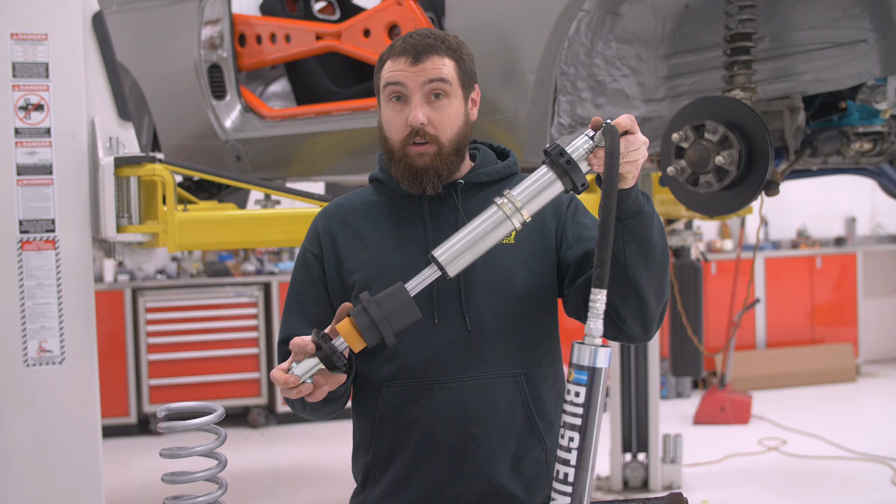For me, we're going to tackle the rear suspension in this video. You're going to see earlier on, basically when we started this project, and wrapping up some of it now. We're going to go from the torsion bar rear suspension to these big Bilstein remote reservoir coilovers for the rear suspension. It's a huge upgrade. We changed a bunch of stuff and it took some time.

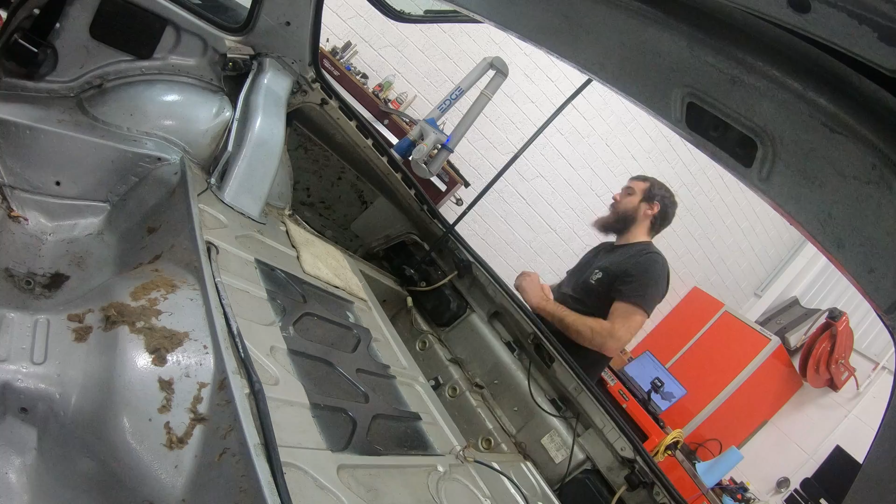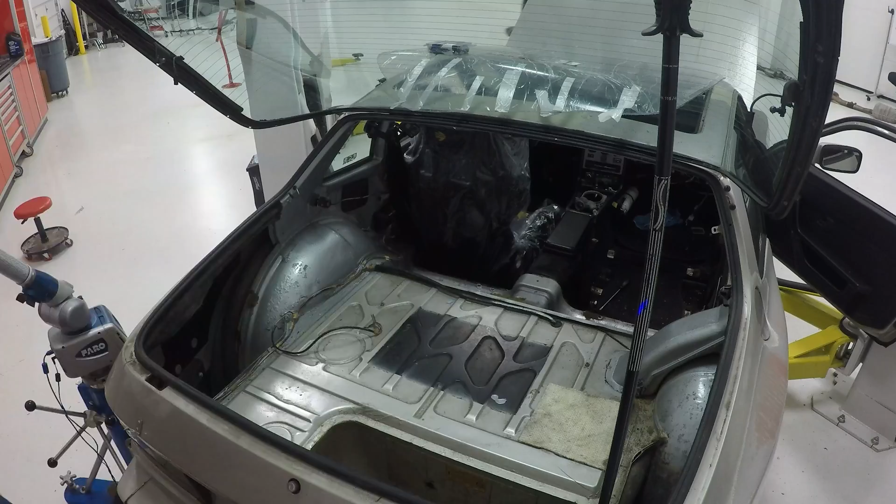For this project, the factory rear suspension would be a weak point, so we're going to do some upgrades. The factory car is a torsion bar setup with a small shock absorber. We're going to overwhelm both those as well as the bushings, so we're going to revamp everything.

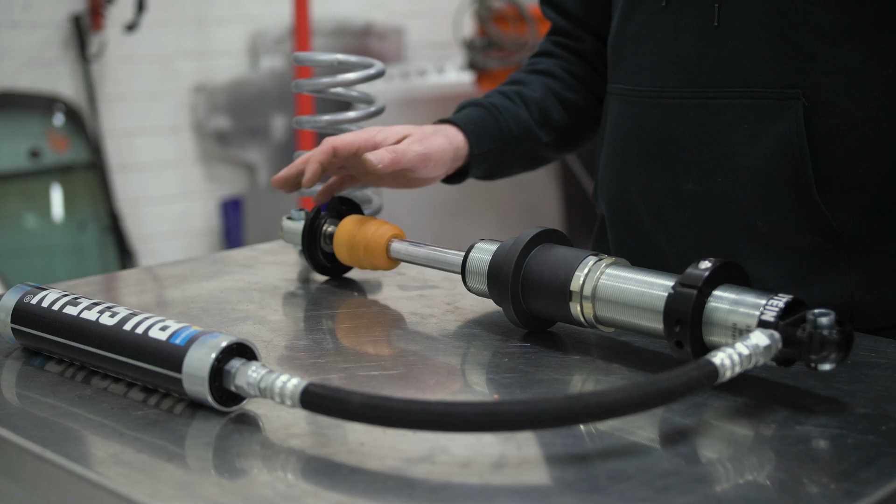I'm going to design everything to work with this much larger 8-inch travel Bilstein remote reservoir coilover. One key benefit is the extra thermal capacity with the remote reservoir. We can adjust our spring rates more accurately and control different ramp rates with this dual rate slider. We can have a different spring top and bottom, and then control where this bottoms out, so we can increase the ramp rate at a certain amount of travel.

So we're just going to try to make the back of the car rugged enough to handle and really utilize this big of a shock. Figured we'd go through a bit of the process here. You saw me scanning before. Once I got all my scan data, I brought it into this software we use, which is Polyworks. I aligned everything, all my different positions.

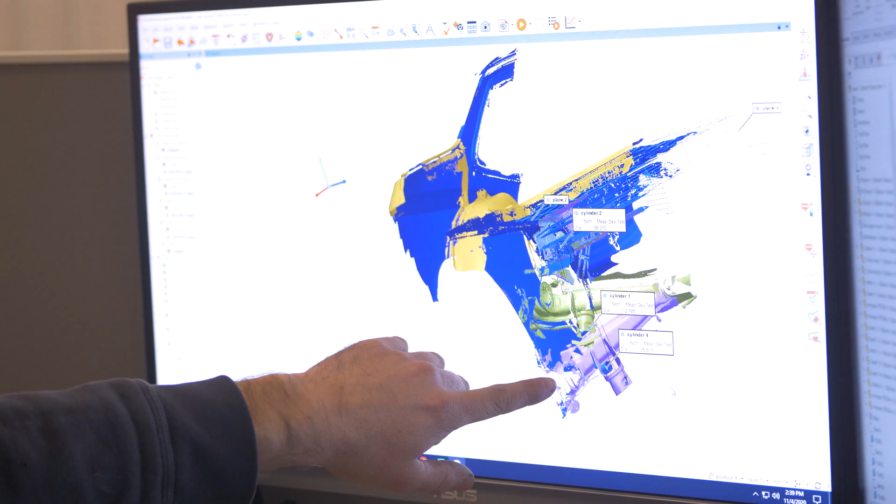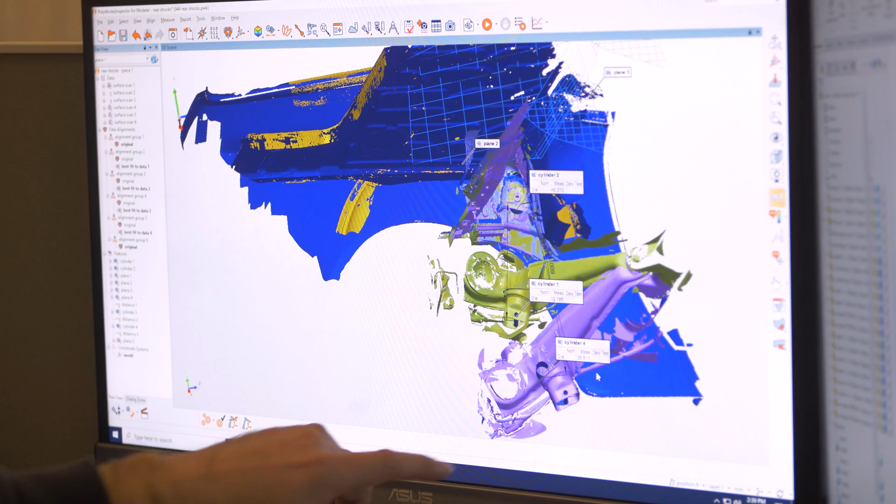This is the control arm at full compression, and this is the control arm at full droop. I was able to extract different features - this is the pivot point of the shock up here, and this is the lower pivot point. I could measure the distance between them, see what it was before at full compression with the old shock, and then I know the dimensions of my new shock. So I wanted full compression and full extension as a baseline of where that was.

Then I made some planes for different areas where I thought I might be putting some plates in to mount the shocks. I just created a couple features there to align stuff, and made a quick version of the shock just for dimensions.

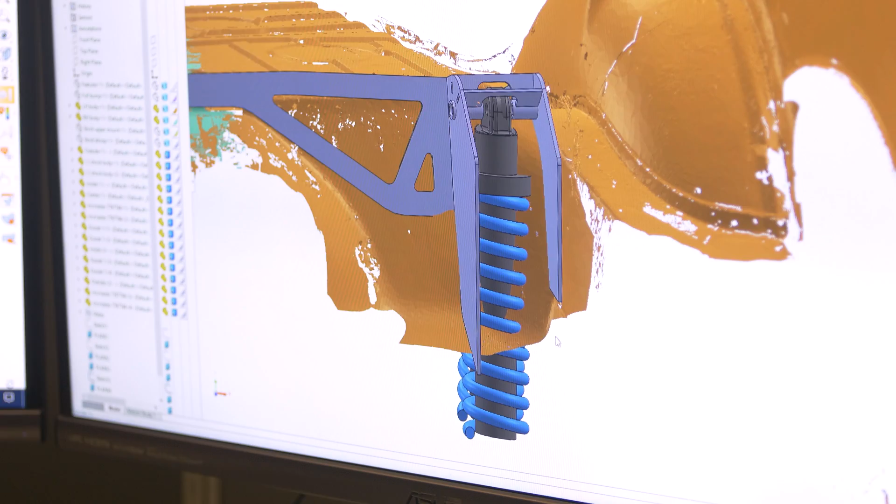I have two in here, as you can see. One is for full compression, which is with the control arm here - I know the length from playing with the shock, so that's where it'll line up at full compression. And with the control arm at full droop, that's this point over here, it'll swing that far forward. So that way I know I'll have space one way or the other.

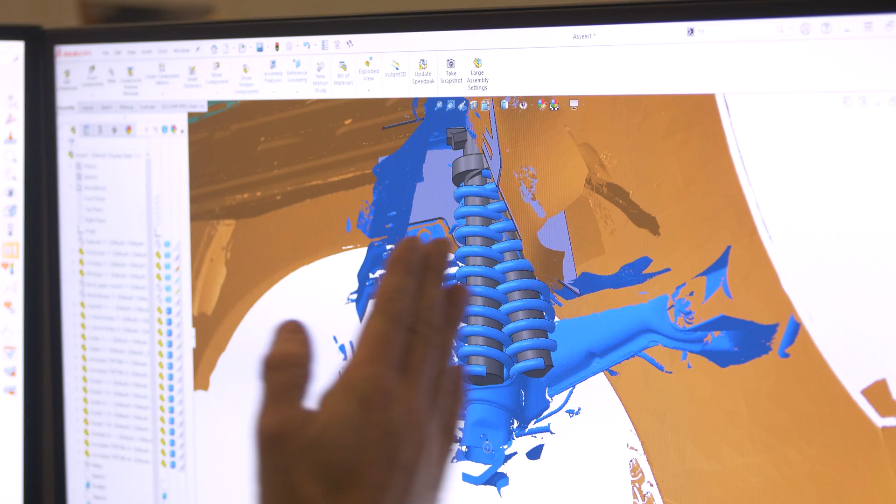The main thing that's in the way is this subframe mount here. At the very full compression, it'll be just kind of touching, so I can trim this a little bit and make sure I have space.

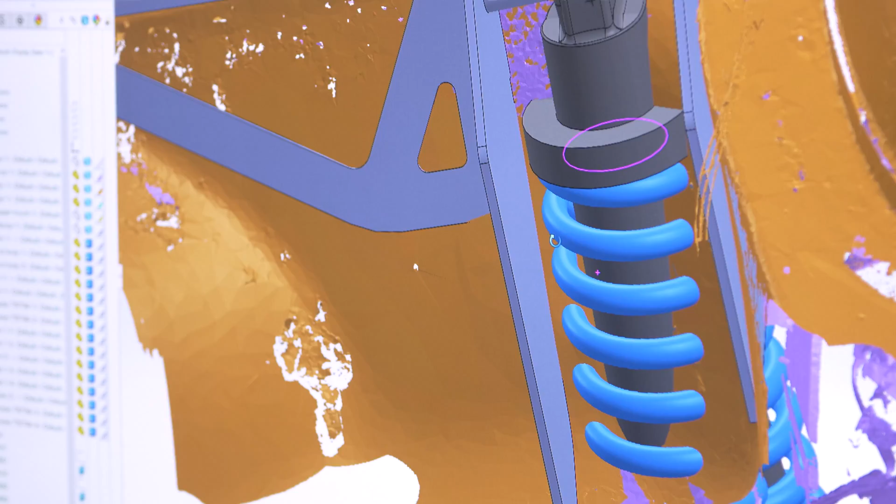This is how much space I need from inside the car. I'm going to plate both sides of it. This is the chassis rail on this outside edge here, so that'll be nice and strong - I can tie into that on the inside. The other thing I'm trying to avoid is this purple smudge here, which is the lip of the gas tank.

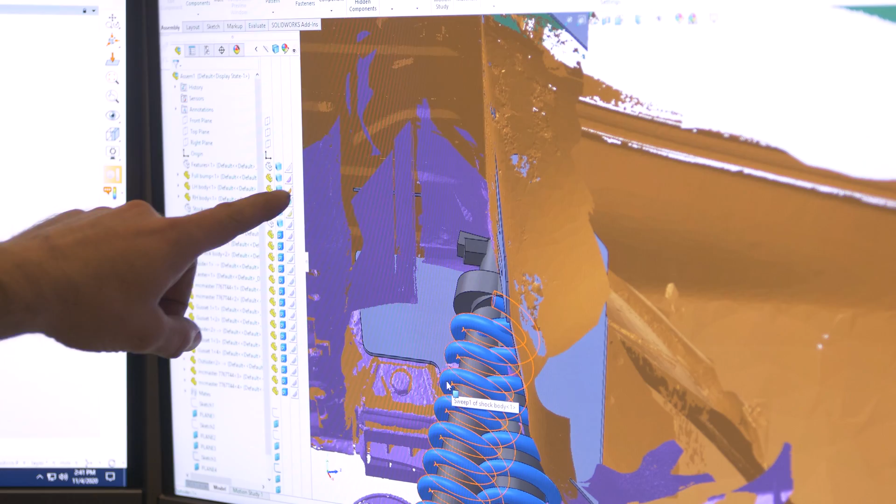So the hose for my shock has to sneak past the gas tank, and I don't want to cut into it right now. So I'm trying to stay in front of the gas tank, leave space for the hose and everything over there, and kind of not cut too far into the car.

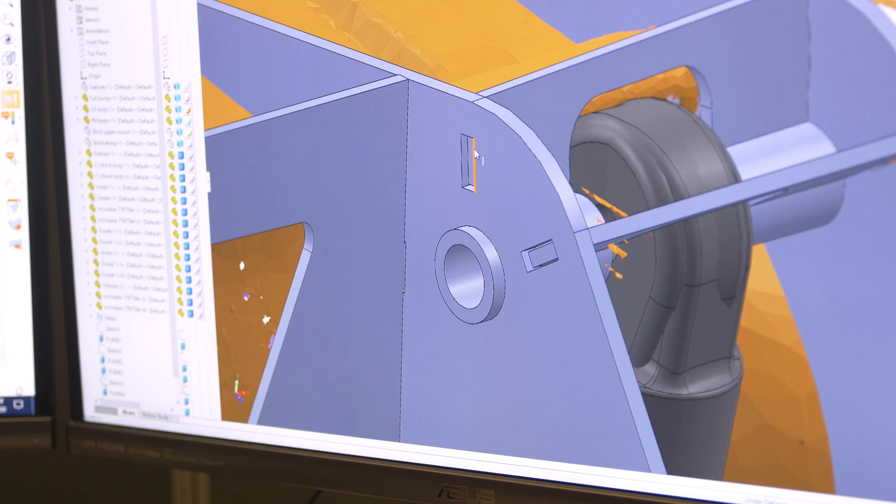Try to minimize that. So I've made these little plates here. I keyed everything together nice. So I'm gonna have these cut out by a friend of mine with a plasma table, so you can cut out little windows in them so that when I get all the pieces here, they align and click together nice. And then I can tack them all, set them in the car, and then weld them all together nice. So, same with this kind of brace between the two.

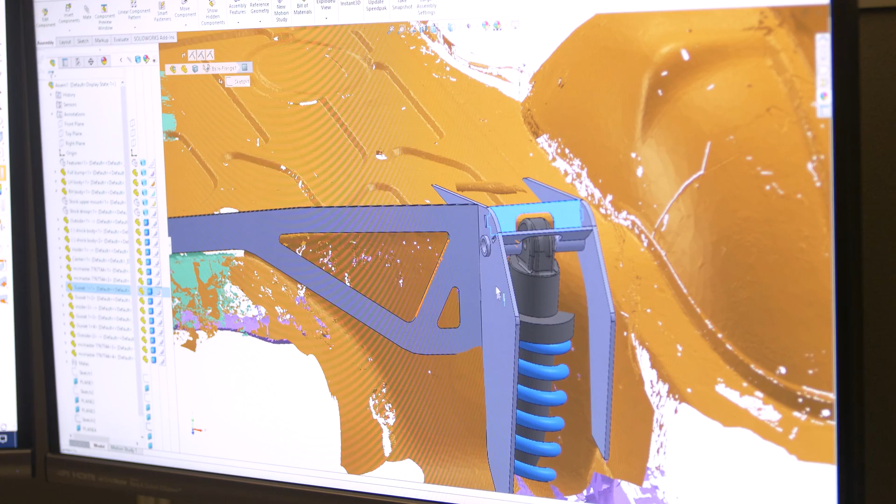This is just sheet metal here, so I wanted a little more support for this outer edge. So it's just kind of a sheet metal brace, but since it's being plasma cut, I can cut out some little windows, keep the weight down, and it'll give me some nice areas to kind of stitch weld into the body with.

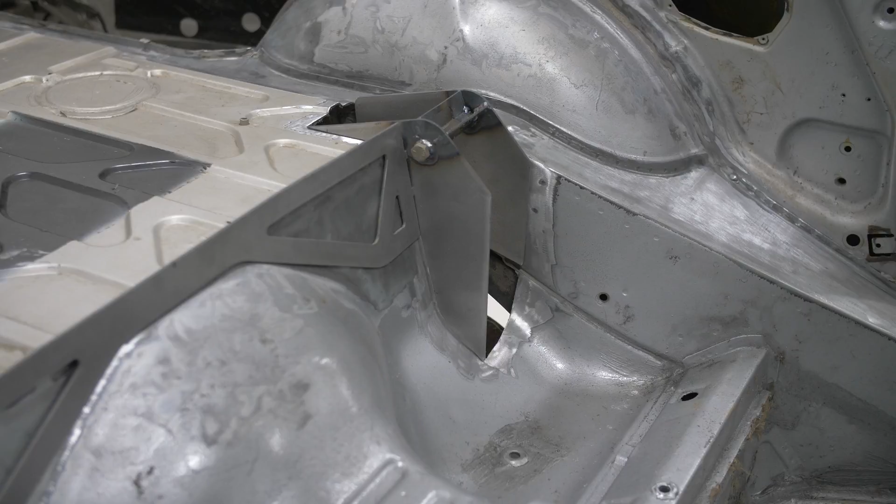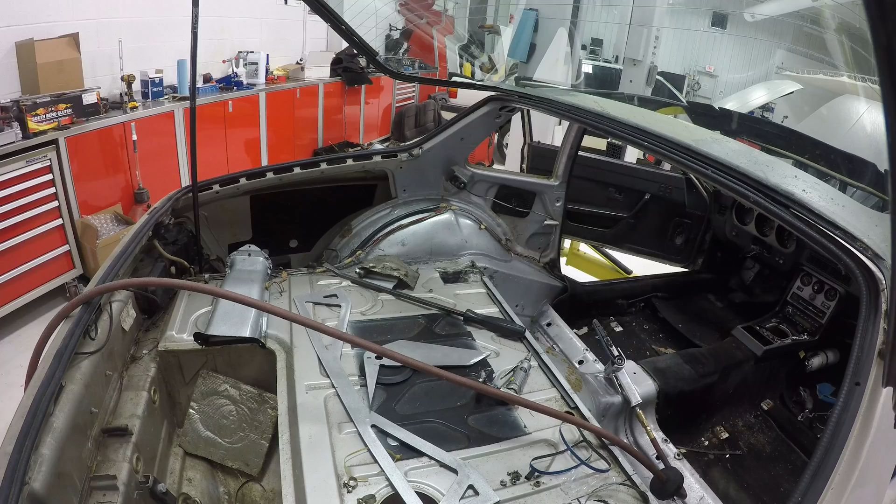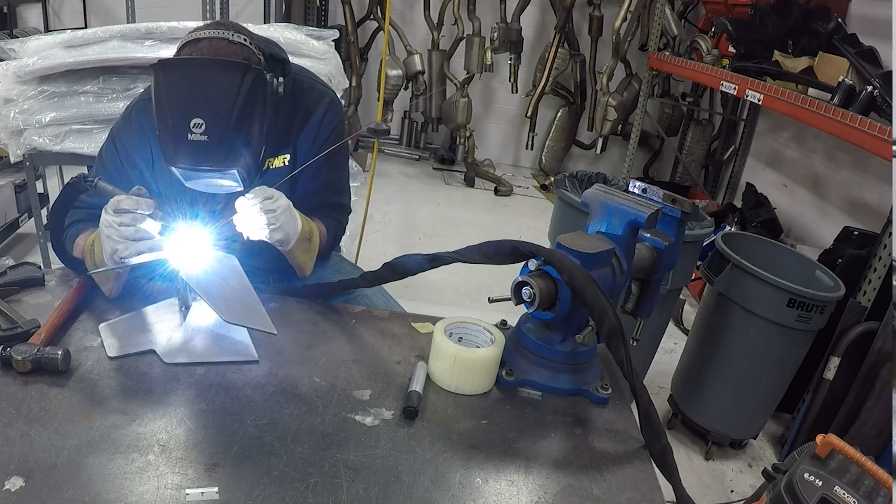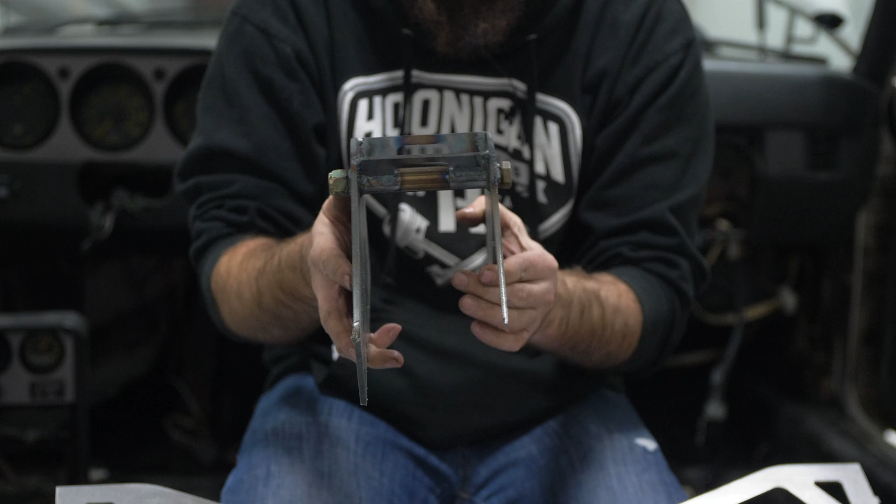So now we have the actual tangible pieces cut out from my buddy's plasma torch. So the next hurdle was cutting out the floor here. So this is one side I tacked up, well, mostly welded up now, but I had it just tacked up. It was the flat pieces I got, and then a sleeve here, and then another little support.

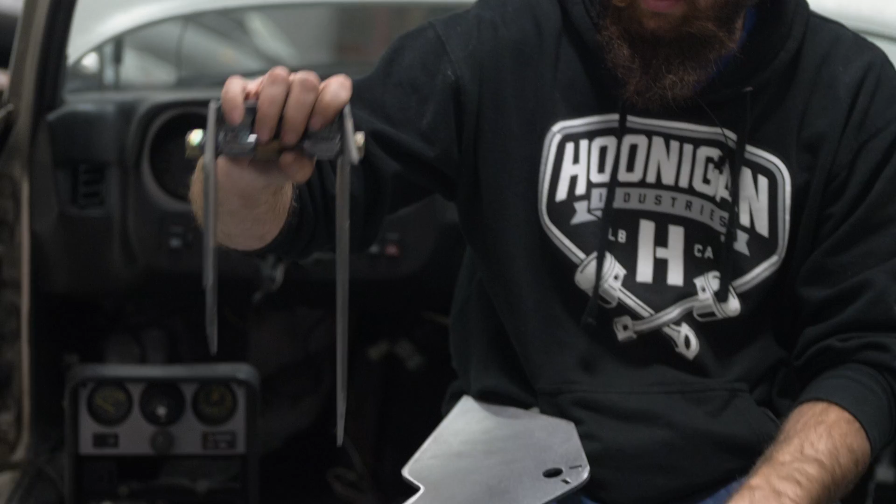So I still have to do that for this passenger side here. But the driver's side is welded up. I kind of just roughed my way in so that this fits pretty nice. I still have a little bit to trim on the inside, but I wanted to leave a little space so I have something nice to weld to.

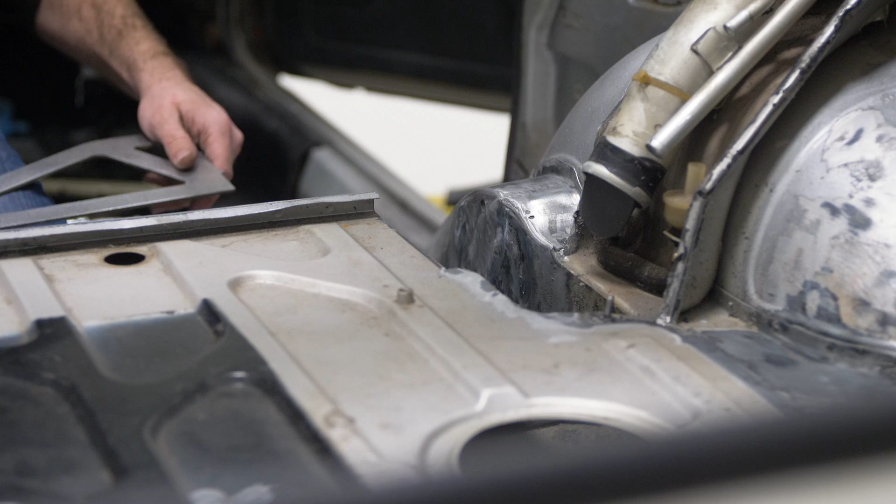So I had to cut out the old shock mount that was inside this frame rail here, and then kind of clean off all the undercoating, which is still a bunch to do. But I just cut this side out last night. So we're going to do the same thing again, where I end up tacking one up and then kind of get it to fit this piece nice.

Then this brace goes between the two here to strengthen it. And then once I can kind of throw the shocks in, I can start figuring out my plates for the top of this. I didn't bother modeling those just in case.

Basically the hose for the remote reservoir, those big Bilstein shocks, needs to go somewhere. I haven't decided if I want it to go out the front yet or out the back. It does have enough space for the fuel tank, but depends on what other things I have in here. So I can currently flip it either way and leave space for that reservoir tube.

So the next hurdle, once this stuff is all tacked in, is playing with the lower mount for the rear shocks. So I got to change the way that sits on the control arm. I didn't model anything up there. Probably won't, probably just going to wing it. But it's a lot more straightforward than this.

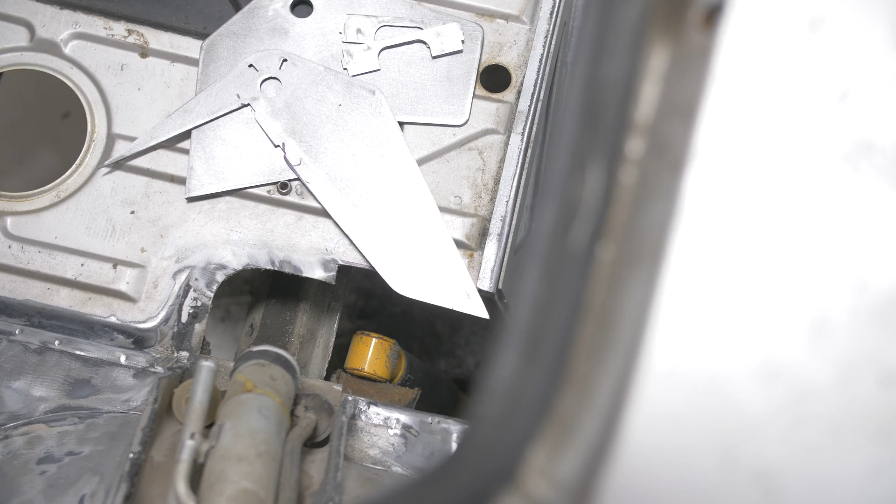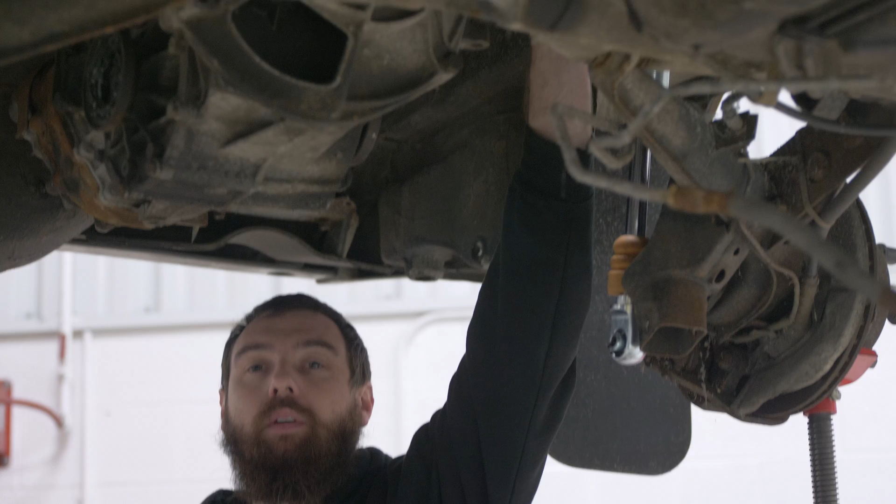Yeah, everything's tacked in, a little more than tacked in. I kind of get carried away welding. But the upper mounts that I designed are in. Shocks hanging in there at the moment.

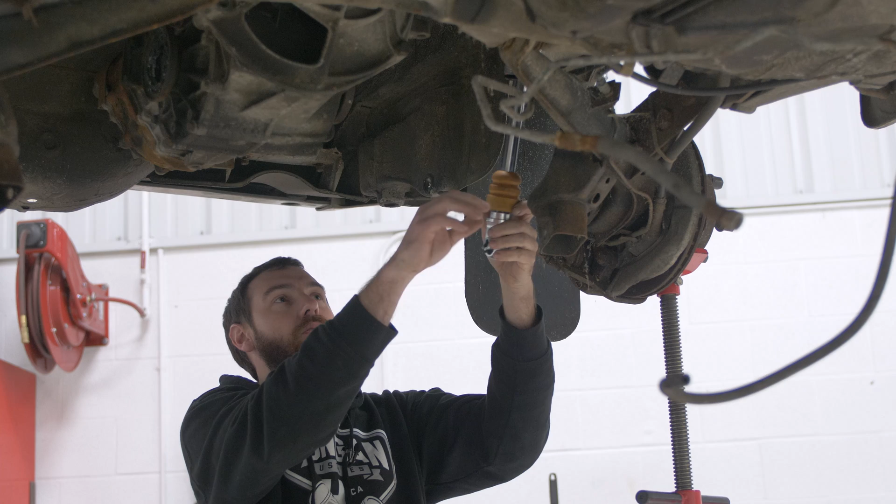I needed to throw the perch on and then start redoing these lower control arm mounts here, because I have a much bigger spring that needs to fit. So I'm probably gonna have to notch the control arm a little bit. And then I want these to be quite a bit stronger than these stamped steel stuff.

But in order to figure out where that needs to be, I had to throw the trans back in, and then I got to throw an axle shaft back in to make sure I have space for the spring between the axle, and then see how far I can get into the control arm.

My fear is I think I'm going to have to notch this control arm a little bit, because when this goes up all the way, it moves forward a little bit. So I feel like the axle has a chance to get into here with the pivot point being so low. You don't want it too high in relation to the wheel, it starts to get towards the center line of the pivot.

So you start to lose the motion ratio of the shock. The top of the shock doesn't move and the pivot point of the control arm doesn't move, just the lower shock and where it meets the control arm moves. So if you have it mounted like this, the more it compresses, it gets to this point where it wants to over-center and you start to lose control.

And that's where you want it to get stiffer, and this makes it softer. So if you move it lower, it'll keep getting stiffer up to the halfway point, which is about where fully compressed is about perpendicular. That's kind of how you want to set it up, so the only times you should be compressing the shock that much are at a huge impact, so you want it to be stiffer there. The motion ratio of the shock will move the shock shaft a little further at those fully compressed points than when it's at droop, where it doesn't matter.

For rally stuff, I'm not going through deep ruts or anything like that. I am going to box them in with some pretty heavy stuff, and that's only because all the stuff getting kicked up off the front tires can kick up big rocks and everything like that that might hit it, but it's not going to hit a stationary object in the trail or something.

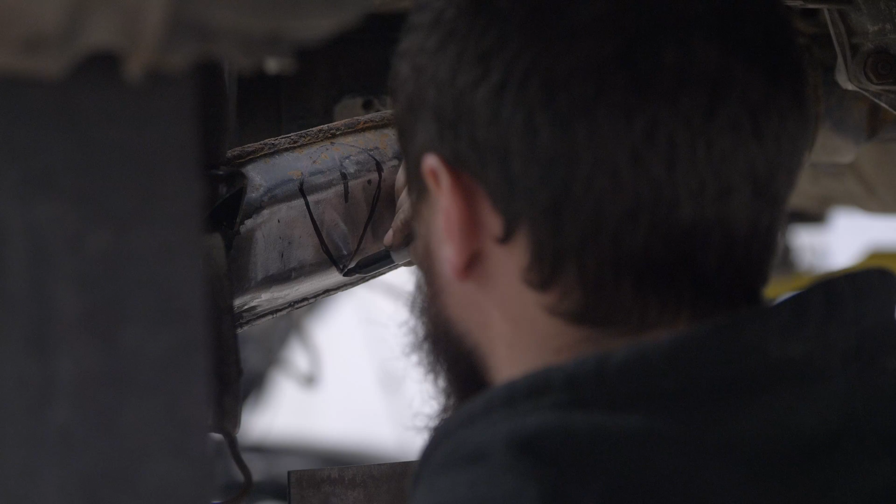Not super keen on this. Will that weaken the control arm? Yes, quite a bit actually. Are you going to reinforce it or not? Yeah, I don't know how yet, but it's going to have to happen.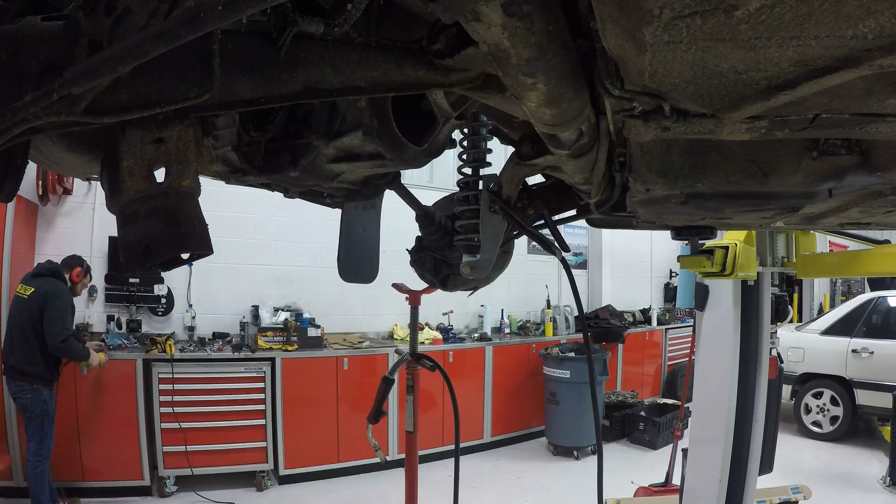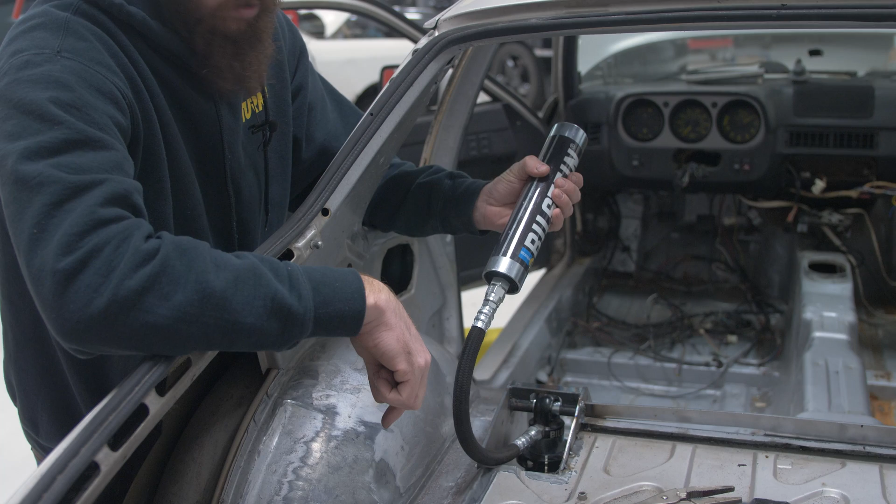Still going to figure out this whole boxing things in bit separately. I want to plate all this, but I want some of the interior stuff done before I do that. Because for all I know, I can flip this right now the other direction and have the resi tube go that way. But right now, it's looking like if I were able to mount it here, that'd be perfect. But for all I know, a cage tube's coming down here for the down bars from the B-pillar, so whether I can put it on a tube and that keeps it out of harm's way, I'm not sure yet.

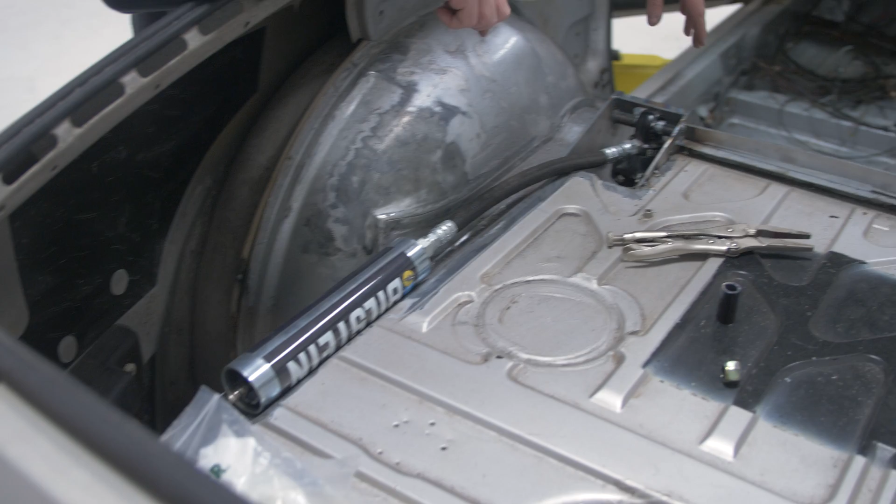So I'm leaving that apart for now, but all the mounting points are figured out. I've now figured out the rear shock mounts, the lowers. As you can see, I cut a big hole in the control arm for the spring.

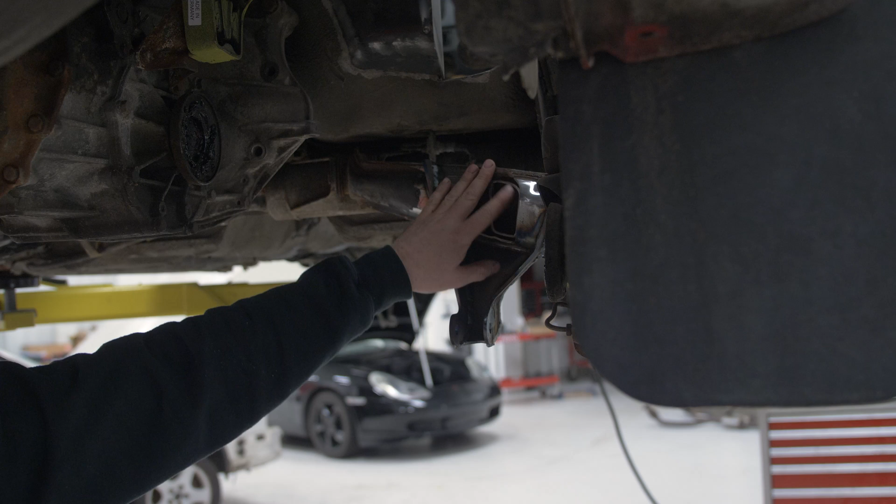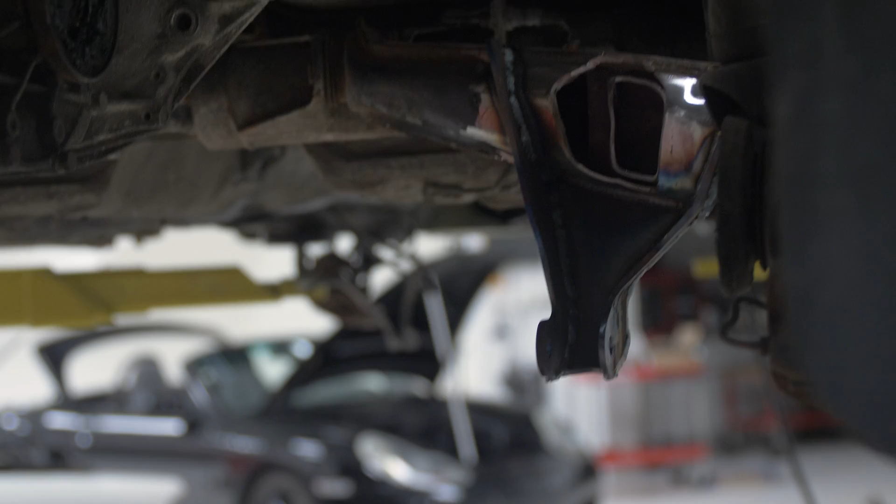They're pretty much in the same location as the stock ones, which did this, more or less, a little lower, but so I'm not worried about dragging these. The tires here, this isn't a rock crawler. I'm not going to be smashing these off stuff, but they are rugged enough.

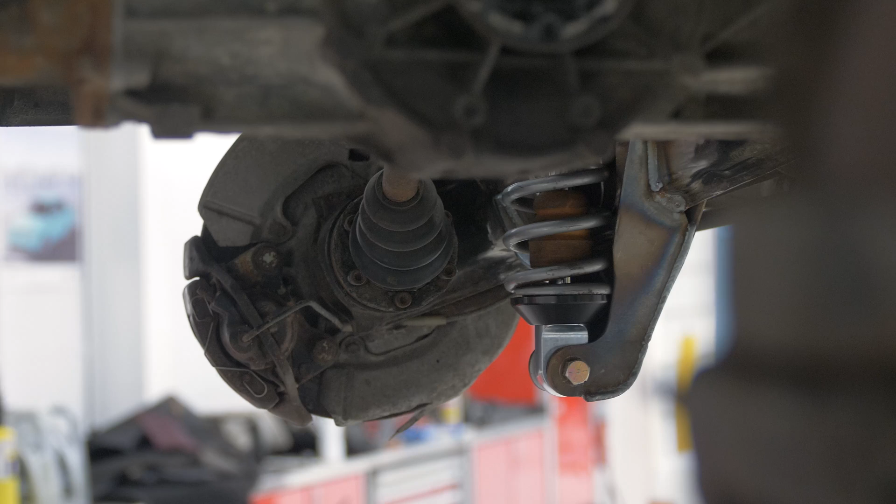It's all 3/16 plate. I had a notch for the spring so that at full droop, it has some space. I am going to plate all that in, and I am going to reinforce the control arm because obviously cutting a big hole in it made it a lot weaker. But I'm going to wait till it's off the car before doing that. So there's tons of space here, but when it's at full compression, that's when it's a problem. Now that I have the spring on, we can't go to full compression.

So this is the rear subframe and control arm from the 944. These are a torsion bar rear suspension, so there's this rod, which is splined on both halves, and it's splined in the center section, and then to the control arm out here, and that's what your spring is. So it had a shock point before, and this was your spring.

These are not that adjustable, and for the amount of travel and abuse I'm going to put this car through, I don't want the torsion bars. So you saw we already cut out the rear floor of the car and made mounts for the nice big Bilstein remote reservoir coilovers, and I kind of figured out my position on the control arm for where those needed to mount. Now I've got to revamp all this stuff to make it hold up and kind of refresh it all at the same time.

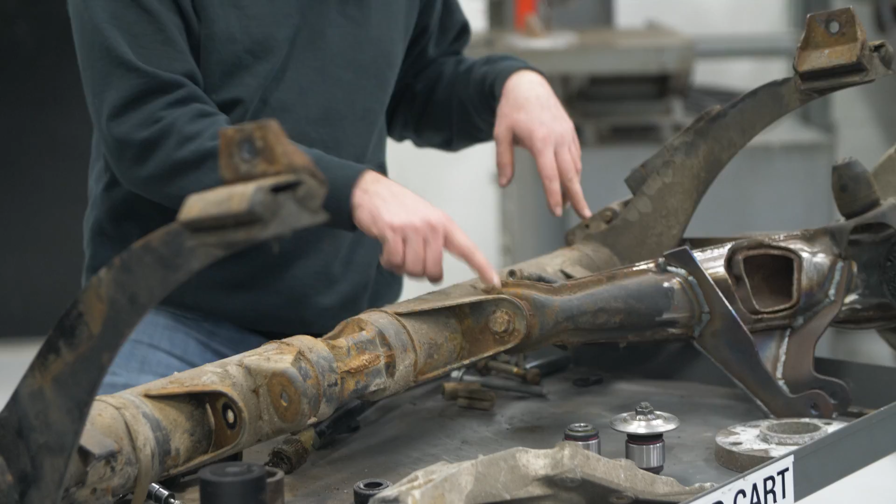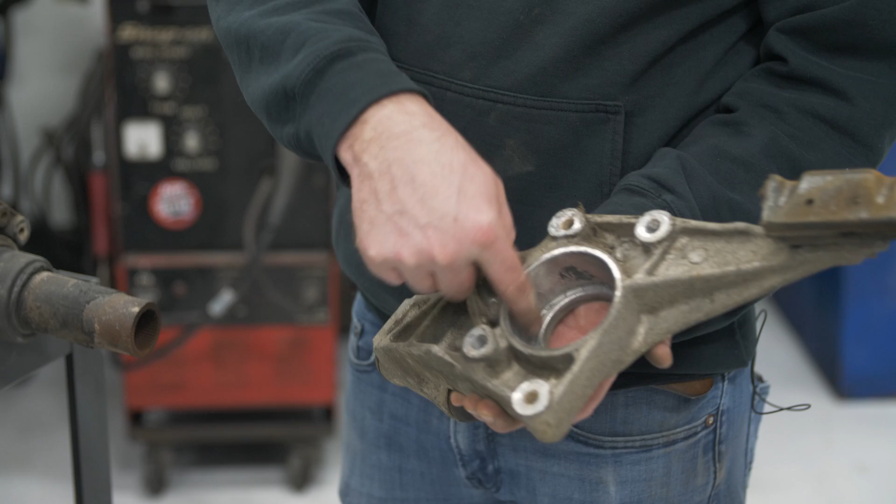There's rubber bushings in both these locations, so I'm converting everything to a monoball style like we do with a lot of our control arm kits. This is the end of the subframe, and this is the bore where the bushing rides factory. This rubber bushing is bonded onto this one part of the control arm, and this is separate so it's adjustable. You can twist it one way or the other, and that's how you adjust ride height with the torsion bars.

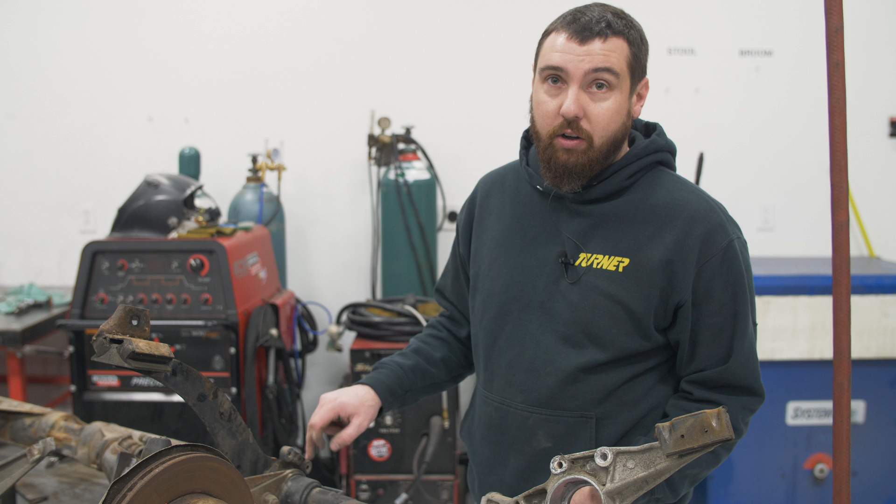All that's going away essentially because now we're going to be cycling 8 inches of travel at the shock, versus before you'd get like 6 realistically, and you never saw that on pavement, nor did it cycle frequently. With this car going through dirt roads and bumps, it's going to cycle a lot more suspension travel, more frequently and faster. So this bushing is not going to live very long at all. Also, it deflects a ton - I noticed the toe change on and off throttle was pretty dramatic, and you could see it on the dyno deflecting both bushings heavily. So we're converting everything to a solid spherical monoball, which will be more accurate, live longer, and I shouldn't have to maintain it again.

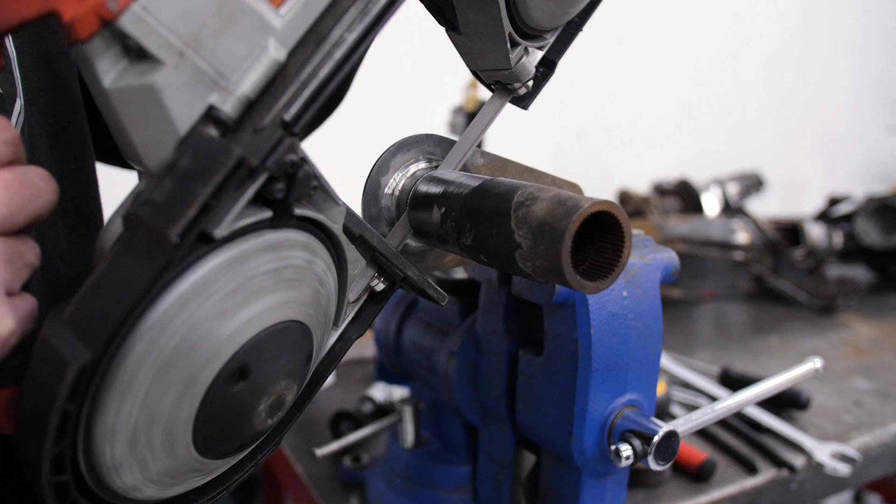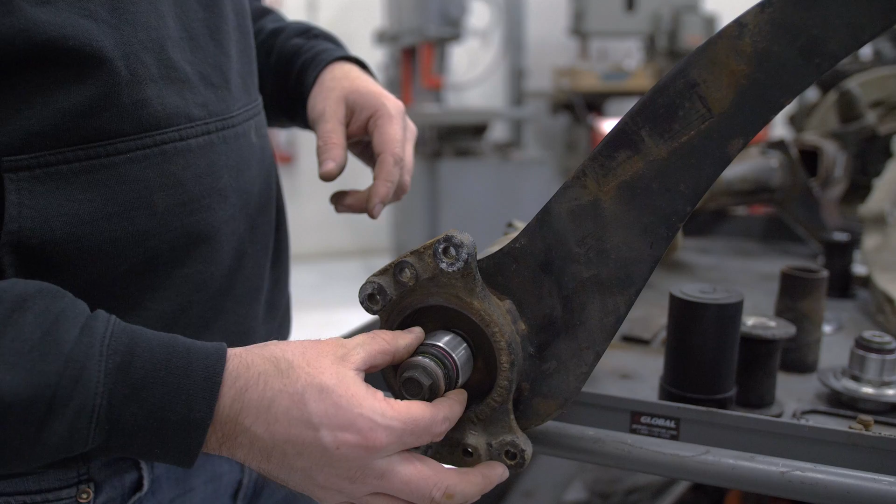This is the outer control arm mount here, which had the spline portion for the torsion bar. I cut that off, chucked it up in the lathe, and bored the center out. Now I can press a monoball into here to take care of this outer location on the arm, but I need somewhere for it to mount since it was just a rubber bushing in this bore. So I turned up a little disc with some threads and a welded nut, and I'm going to weld that into the end of the tube. It locates really nicely - this is the end of the subframe, an aluminum piece that bolts on here.

This part has a rubber bushing that I'm going to replace and mount to the car there. There was a rubber bushing here too, pretty old and decrepit by now. So I turned some little Delrin inserts, so it'll be pretty much a solid bushing. This will press into either side here and locate into the body of the car.

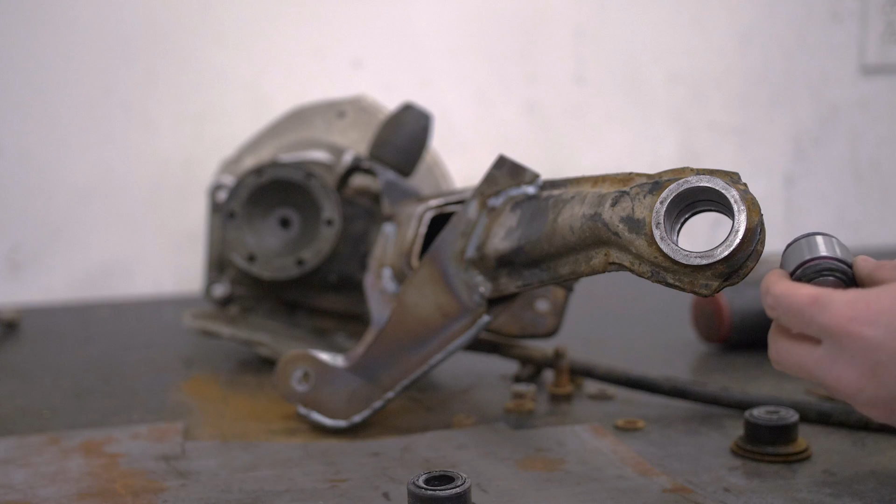The inner control arm mount was just a pair of rubber bushings, and those aren't going to hold up for what I want to do, especially with all the travel we're going to get. So I chucked this up in the mill, fixtured it in, and bored this out for the monoball, which will press into this location. That just leaves reinforcing the control arm, because I had to take a big notch out for the coilover spring at full droop. So we're going to plate this in - I'm cutting some plates to box in the backside of the control arm and re-strengthen it, so we'll have a nice, hopefully bulletproof setup for the back of the car.

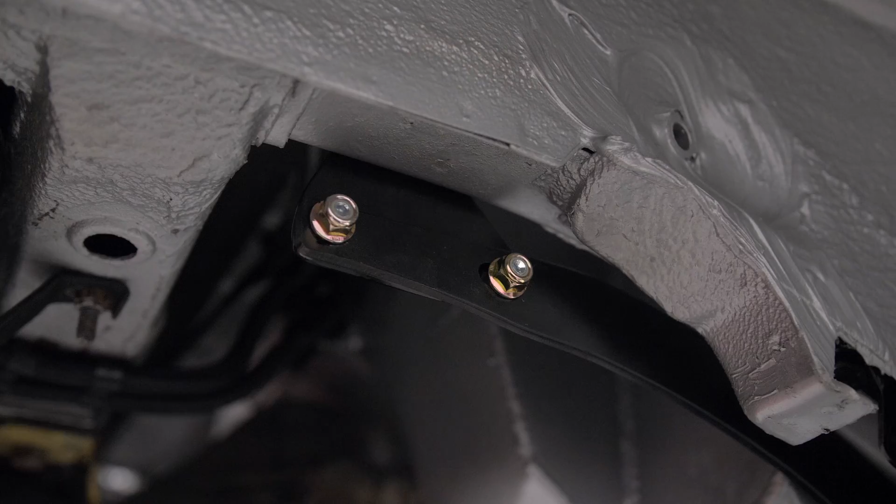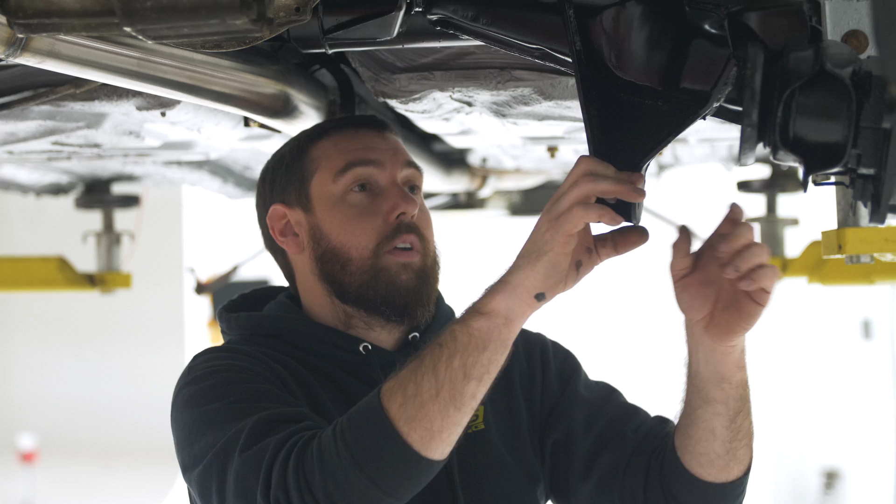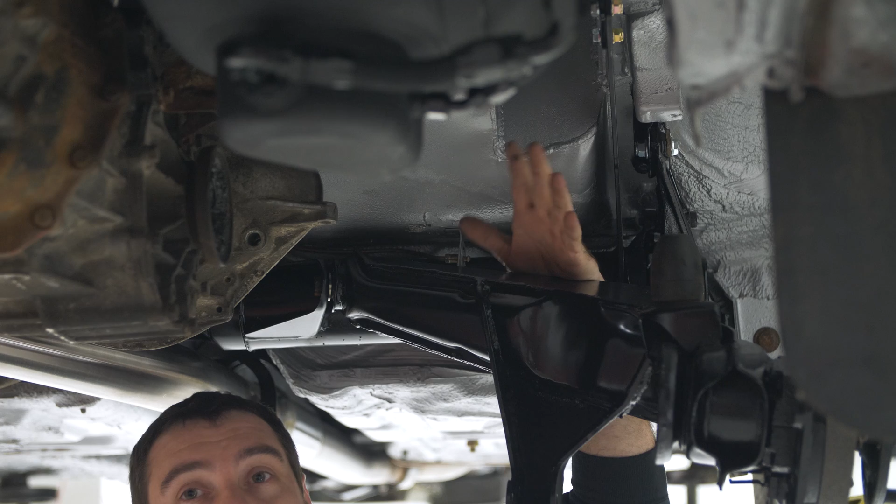So for the rear suspension on this, we've gone from just a single small shock mount with a torsion bar setup, to now a fully adjustable coilover setup. We've made mounts here, boxed in and strengthened the control arm. I cut out the floor, made all sorts of reinforcements to bring a much larger off-road capable shock into the cabin, so I could cycle the full travel. This should make a huge difference on this car, because the rear suspension on the 944 is kind of a weak link for doing rally things.

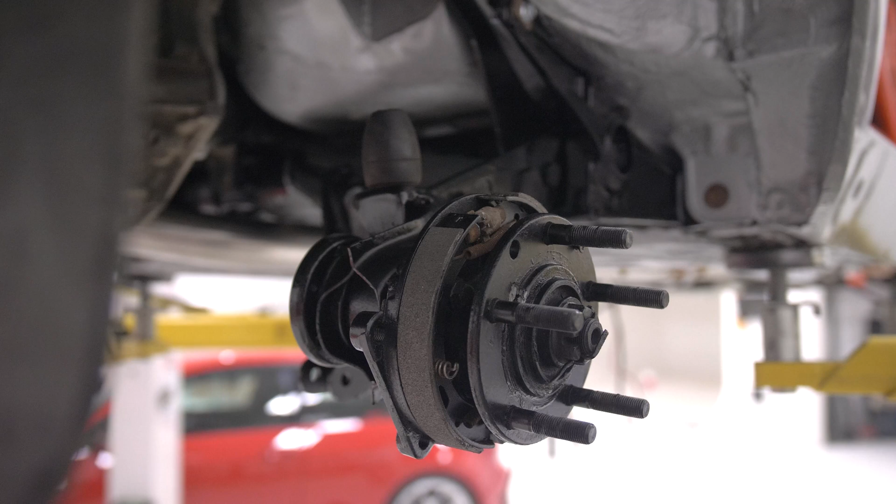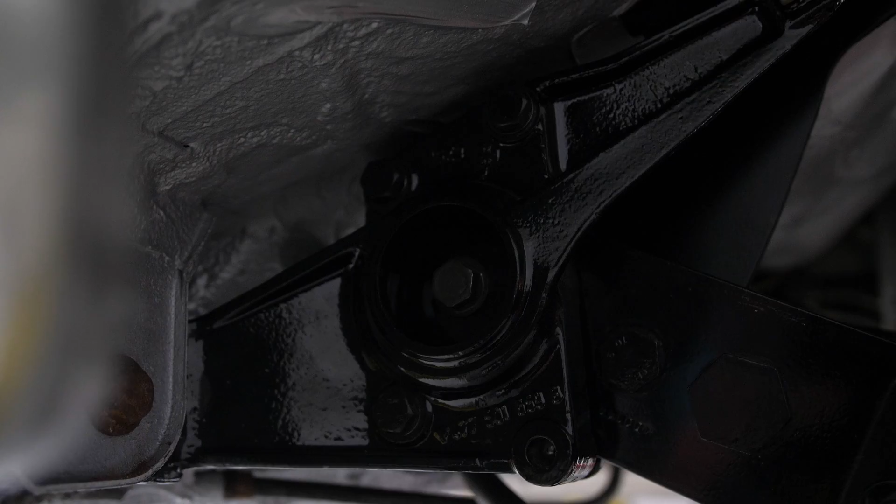So that wraps up the redesign of the rear suspension on this car. Next up, we're going to dive into wiring. Wiring is something that takes quite a bit of time, and that's kind of where we are right now.